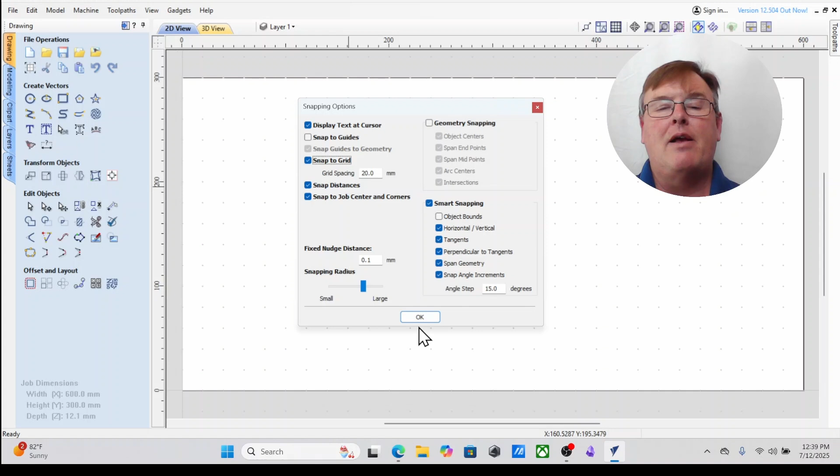Then we're going to take advantage of the grid snapping. So go to the grid snapping tool, top of the Vcarve software, click on it. Some dots should appear. If they don't, go ahead and click F4 and click on snap to grid. I like them every 20 millimeters and click OK. That allows me an easy spot to reference off of.

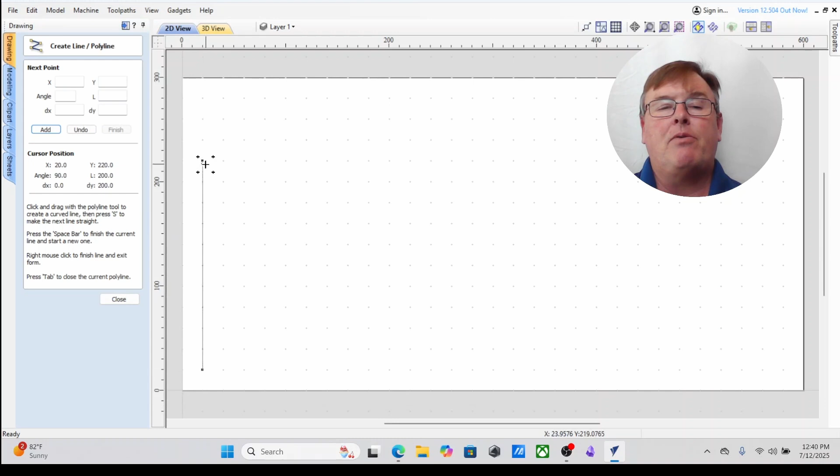Then I'm going to create an L bracket and a couple horizontal brackets on here that we could do profile toolpaths on to create our braces. Let's go ahead and do the corner brace using the polyline tool. Click on it. I'm going to start one dot to the right and up, and I'm going to trace an L pattern going 40 across and creating a structure something like this. You can make it however big you want it. I'm going to click close.

There's our L bracket. This would be a problem if we came with a CNC bit, because it's a round bit. It's not going to be able to get this corner perfectly, and we want this edge and this edge to stay perfectly straight. So we need to cut a little pocket so that we can push a board this way and down and not have it run into the corner that is not correct.

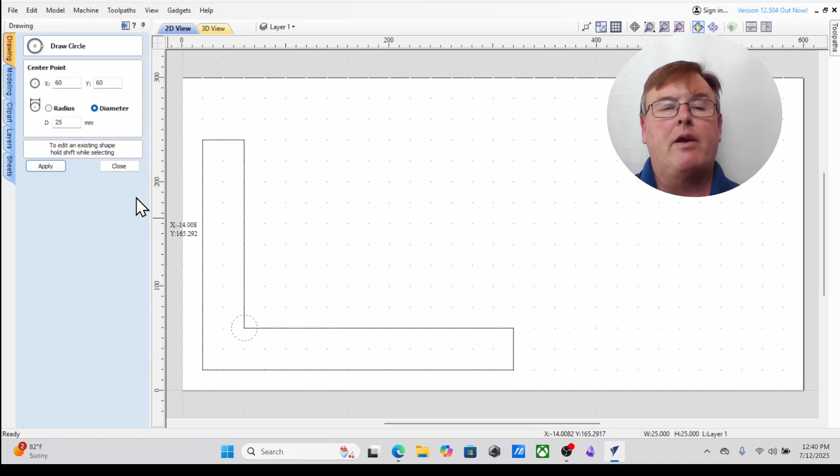To do that, we're going to go ahead and click on a circle, and we're going to put in a diameter of 25 millimeters. Click on that corner. Then we're going to go down to Edit Objects. We're going to find the little scissors, which is an interactive trim tool. Click on it, and we're going to cut out some of these lines. Now we have a nice corner spot to put a board against.

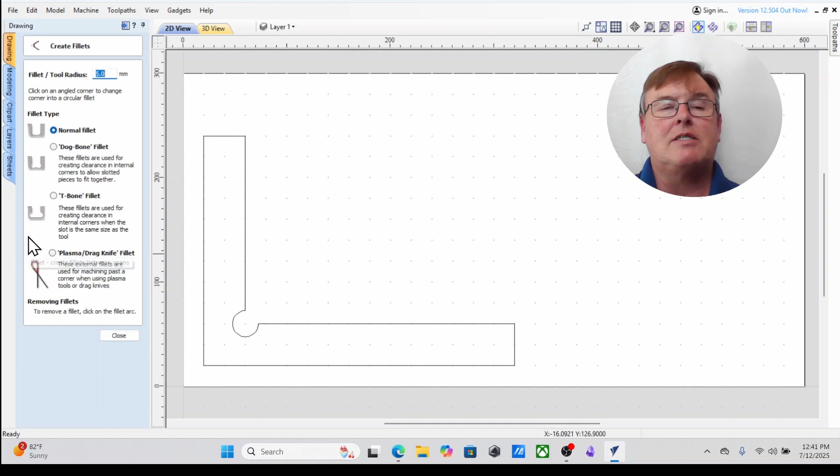We can make this even nicer. Let's go ahead and utilize another feature that's inside Vcarve. Under Edit, you should have something that says Fillets. Change the tool radius to 6 millimeters. That's a nice corner. And everywhere there's a corner, we're just going to click on it, and that will smooth everything off nicely. So we get good, clean lines when this machines, and we're not going to run our hand into it and scrape ourselves up in the future.

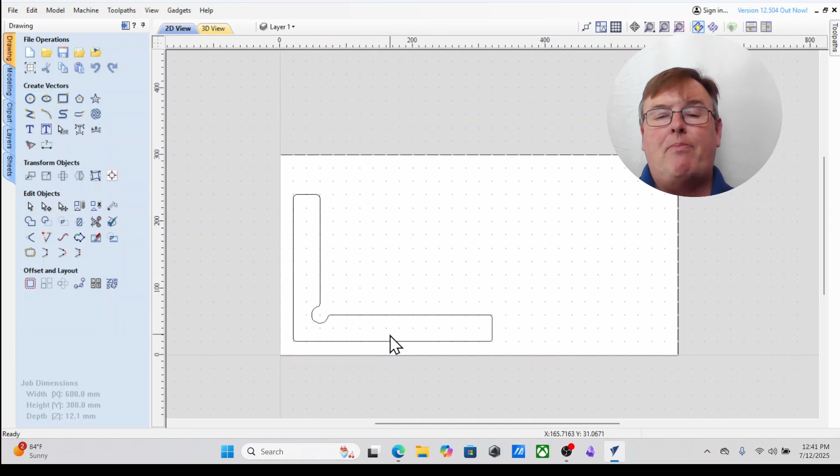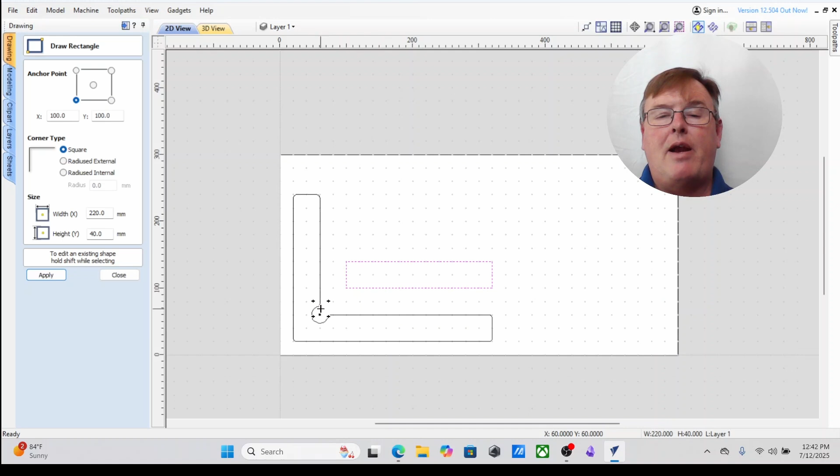At this point, we could go create a profile toolpath, but I'm going to stop there for the moment, and let's go make a couple other ones. I'm going to use a different method now. I'm going to just use a rectangle tool, and I want a nice horizontal rectangle that I can use to mount, and I want it 40 high and 220 wide, and I'm just going to click on here. The starting point will be on the bottom left-hand side, so I'm going to click it maybe down here, and there we go. Let's go ahead and fillet off those corners. So I'm going to come in here and I'm going to put some fillets.

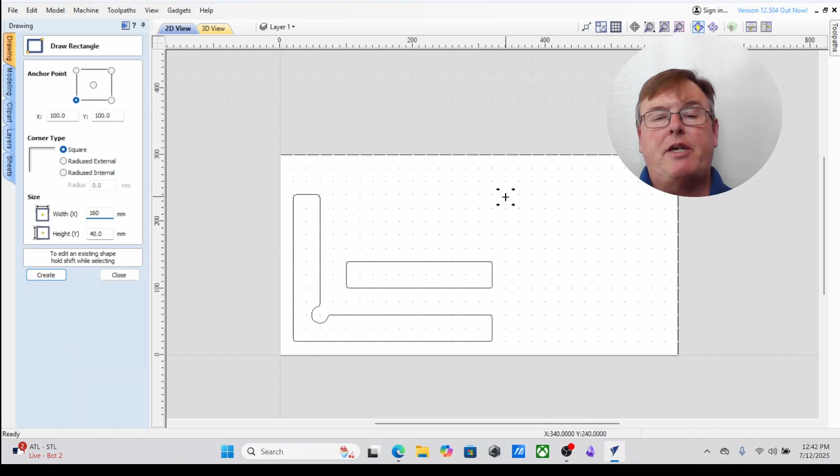And let's make another smaller brace. Let's go and click on the draw rectangle tool. And let's say this is 160. Let's make a little pieces that we can mount on our CNC machine. You can make these whatever size you want. And I want to just go ahead and put it up here and click on it. Let's go ahead and fillet off those corners. We're still using a 6mm fillet. Like so.

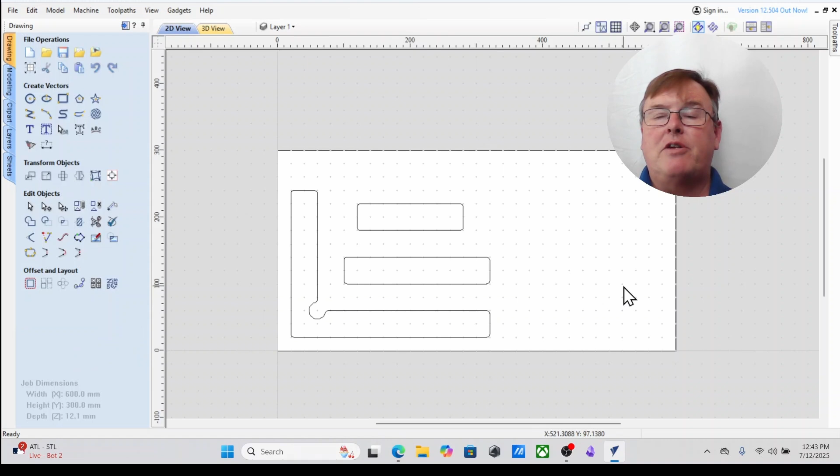If this is your first CNC, we could just profile toolpath this off, hold down my left mouse button, keeping it pressed, and dragging a box across to encapsulate all those vectors. Now they're all selected, they've lit up in red. Go over to my toolpath tab, click on the thumbtack so that it holds it in place. Under toolpath, go click Profile Toolpath. For the start depth 0, for the cut depth, whatever your board thickness is that you're cutting your pieces out of. In my case, my plywood was 12.1 millimeters thick.

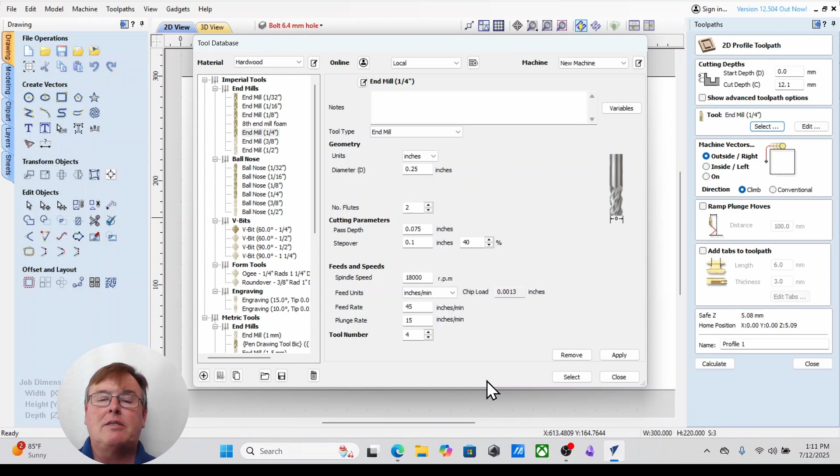I'm going to select my tool. I want a downcut bit so that it makes the top edge of my plywood as nice as possible. So this is a 1/4 inch downcut end mill. I want to cut outside the lines. So by doing that, my bit will come around and the far edge will be on the outside. That means this distance here will stay the full 40 millimeters, which is ideal since my grid lines were that way. When I screw this down into my main spoil board, I can just line it perfectly over those grid lines and I know that I'm perfectly parallel.

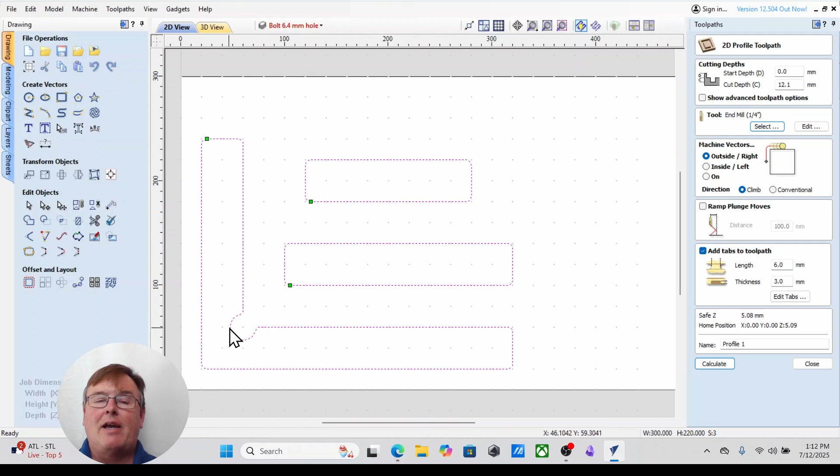Then I need to add in tabs. If I were to cut this as is, when I do my final pass, one of these pieces comes rattling loose and potentially flies back at me or, more likely, damages the surface. With that being said, I'm going to put in enough tabs that I think is going to hold it secure. Put as many as you think are necessary. And here's what I'm using for my tabs. I don't really want to put tabs here, here, here, and here because I want this edge to maintain as pristine a condition as possible. Same thing here, I'm going to call this my good edge that I'm going to be mounting boards against.

So I'm going to put my tabs on the other side of here, and to put a tab in, you just need to hit the edit tab button and just click wherever you want the tabs. I'm going to put about 3 on each side around each of these structures like so. And I want 1 on each end. And when I get all done, I'm going to cut these tabs and sand them off anyway. But I still don't really want to have anything marring up my good edge. Something like that's great.

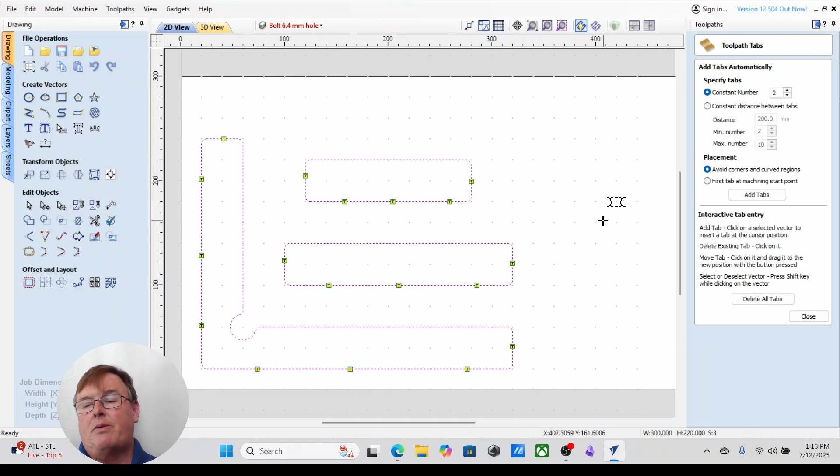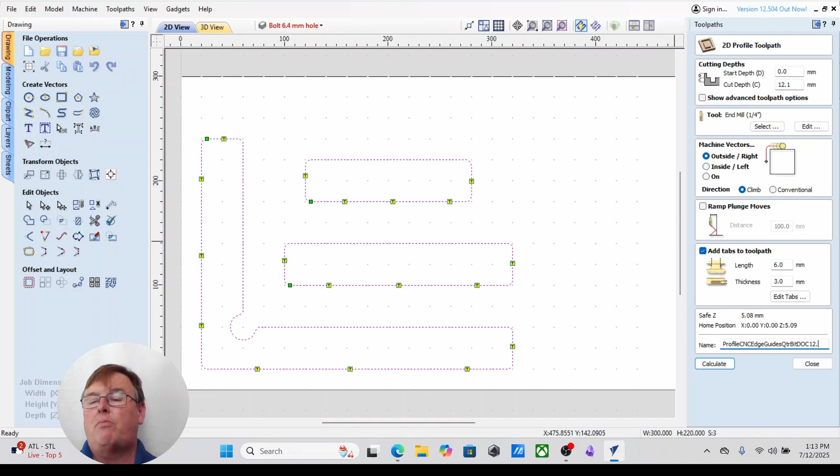And let's change the name of this. We can just call this Profile CNC Edge Guides, 1/4 bit, depth of cut 12.1. Calculate. Let's see what this is going to look like. So I'm going to reset my preview and preview visible toolpaths. And there we go. And you can see those tabs would hold it in place.

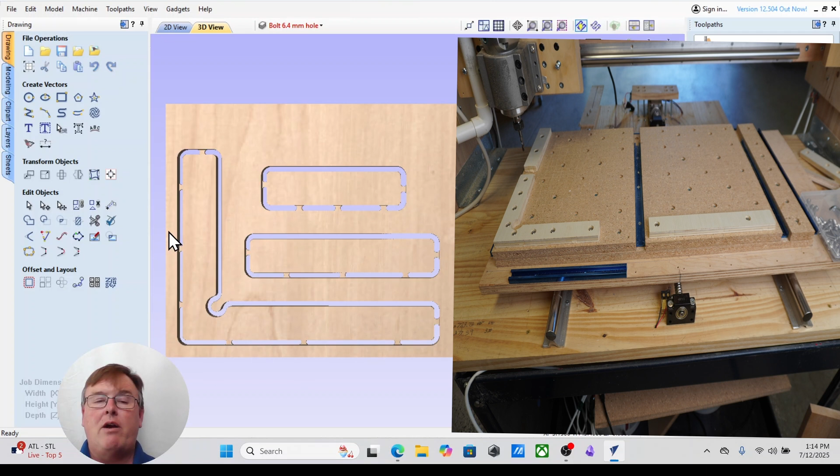And then we could go cut them out. Place this over the grid lines that we already have cut into our spoil board. Screw it down. This would be in the corner. These would be, you know, 1 out here and maybe 1 up here, rotated. And you could make that work.

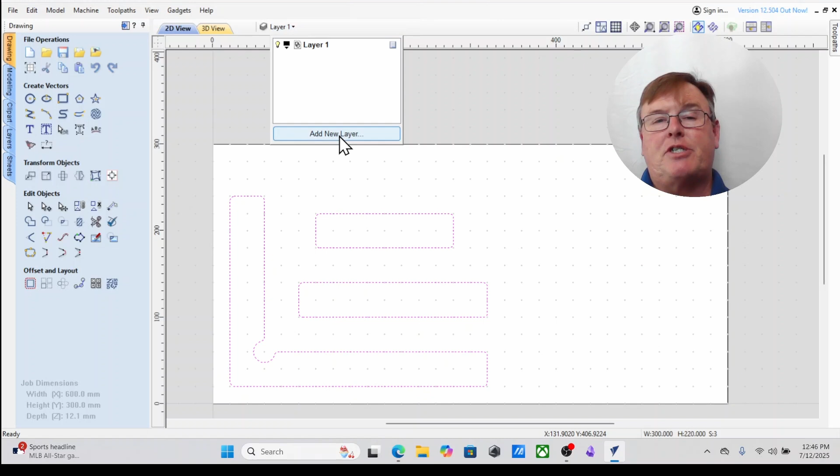I'm going to go into my 2D view over here, and I'm going to put in some insets for some bolt heads, and I'm also going to put in some 1/4 inch bolt holes for different positions that are evenly spaced across each of these. So let's do that, and it's handy for selection purposes to add a new layer. So I'm adding a new layer, and I'm going to say this is bolt head insets, and I'm going to go 12.5 millimeters diameter. So let's do that, and then you can decide where you want to put the bolt heads. Those bolt heads are going to have threaded inserts underneath that we can go into.

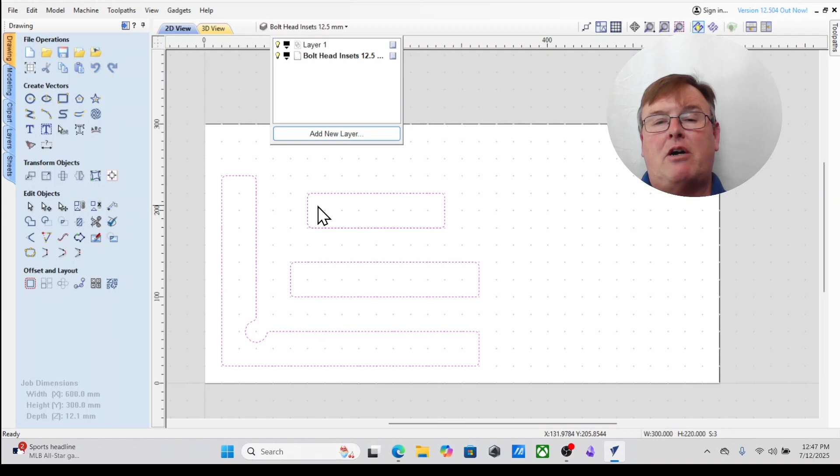So you want to be thinking about where a position is on the board below your spoil board that you can actually have spots for threaded inserts. You don't need them in all these spots, but it's better to actually cut the positions here, even if you don't end up putting threaded inserts into all the positions on your actual spoil board. I think it'll make more sense when you actually see it done. So let's go ahead and do this now.

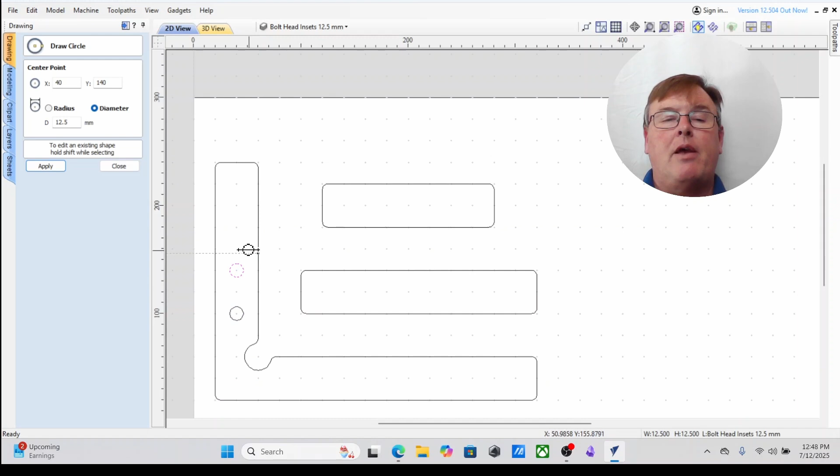And I'm going to click on the circle. I want the diameter of this to be just slightly bigger than my bolt head. I'm going to use 12.5 millimeters, and I'm going to click it in positions that I think would be a good spot. I'm going to start the first one at 80, and then, excuse me, this one was 100. I'm going to do at 140, at 180, and at 220.

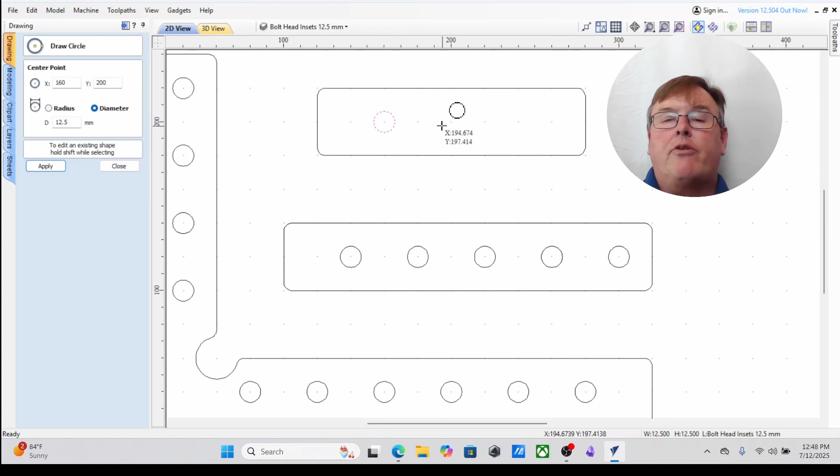Then I'm going to come across here, and I'm going to do one at 80, and I'm going to do it every 40 beyond that, all the way out for everything that'll fit. I'm going to do a similar strategy for these other pieces. So I'm going to just go fill in along the way, and you can decide where you want to put your bolt holes. Oops, I don't like the middle one there. I would like it like that, so it's nice and evenly spaced. That makes it easier to put your threaded inserts below. That looks great.

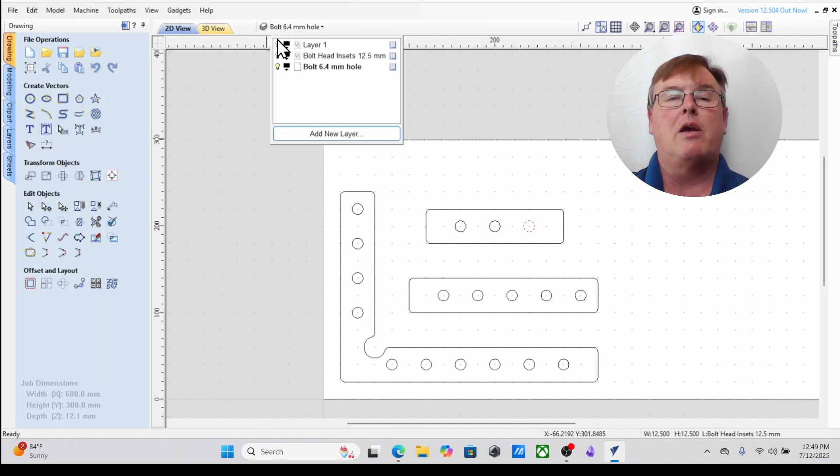And let's go ahead and do another layer. Add a new layer, and this will be bolt 6.4 millimeter hole. With that being selected, I'm going to turn off this other layer and make sure this one is the active one. I'm going to just go ahead and click on a circle. Make sure you change the diameter to 6.4 millimeters. And everywhere one of these was, I'm going to just click inside of it and put my inner bolt hole.

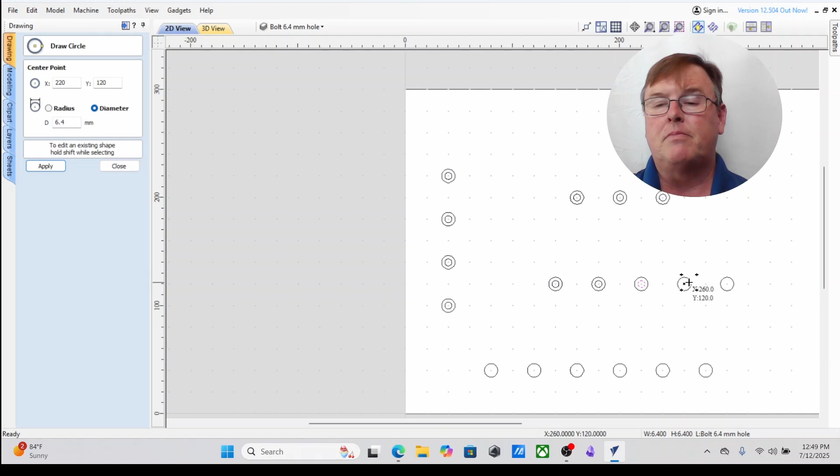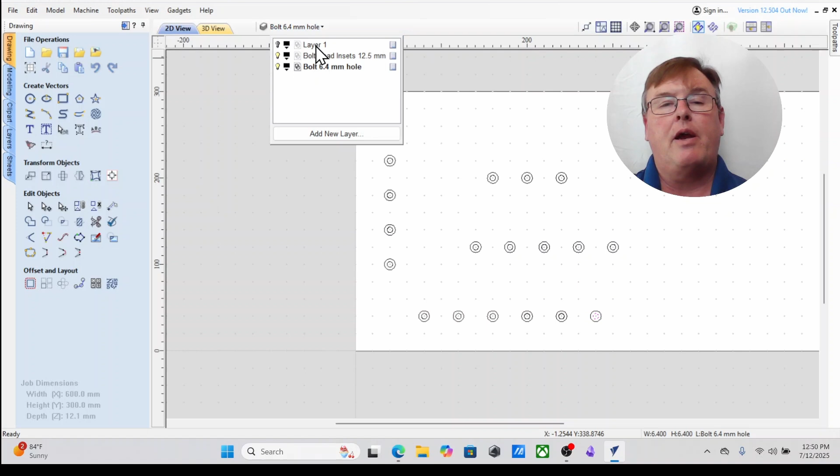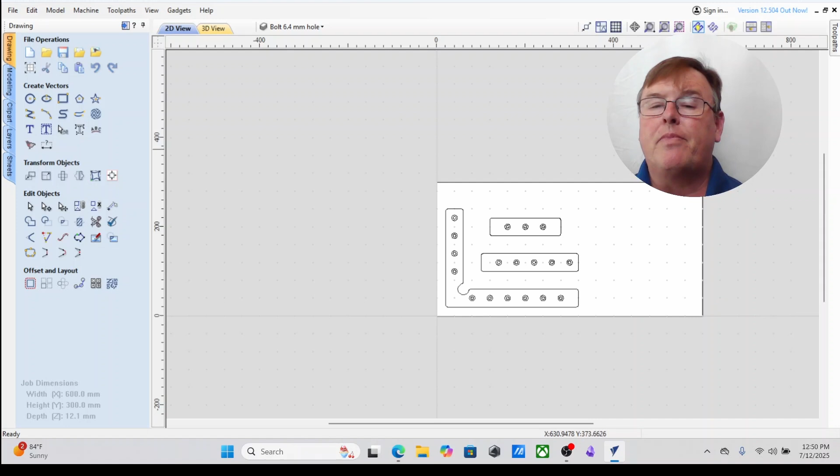It's pretty fast. Close. We go back to my 2D view and let's make all these active. So there's all our pieces. Before I do anything else, let's go ahead and save this file. So let's save it. And CNC, I'll just call it braces. Something like that. Now let's go make some more tool paths.

I'm going to unselect that by clicking off, and I'm going to go ahead and turn on my bolt heads, turn off that first layer. I'm going to go select all these in one swoop. Then I'm going to go do what we call a pocket tool path, and I'm going to do a start depth of 0, and I want it to be the depth of the head of my bolt, which I'm going to do 3.5 millimeters. I don't want a 1/4 inch or an 1/8 inch bit. I'm going to remove this. I'm going to select, and I want that 1/4 inch down cut again.

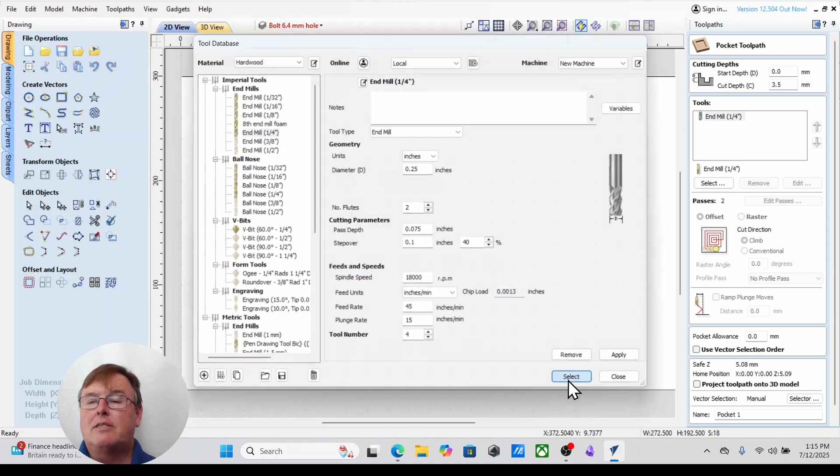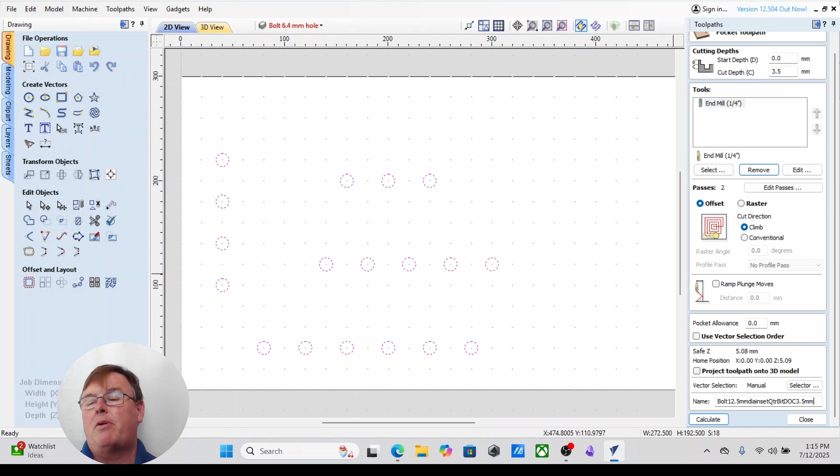Select it, and everything looks good here. We're going to call this bolt, 12.5 millimeter diameter, inset, 1/4 bit, depth of cut 3.5 millimeters. Calculate. Now, I really would like those to be cut before this other profile toolpath. That'll minimize the chance of it putting stress on those tabs.

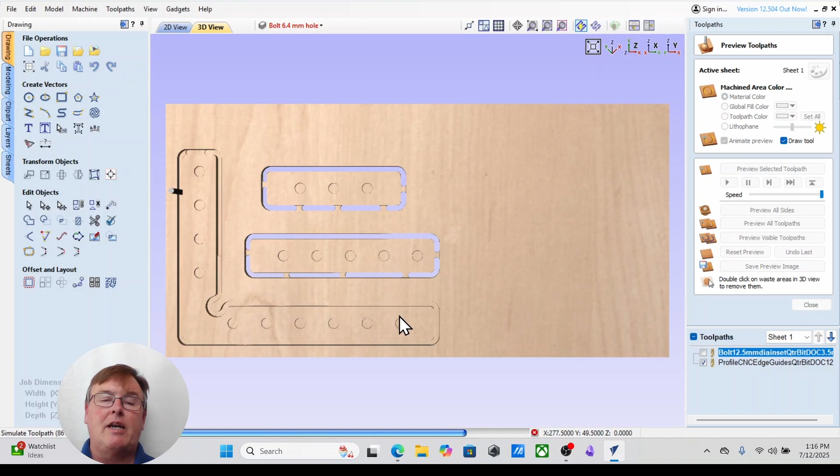So what we can do is, with that selected, go ahead and click this up arrow and we'll move it above. I'm going to now select both of these. I'm going to reset my preview, and then I'm going to preview visible toolpaths, and you can see that it cuts the insets first and then it does a profile. That looks great. And now finally we need to go get the last one.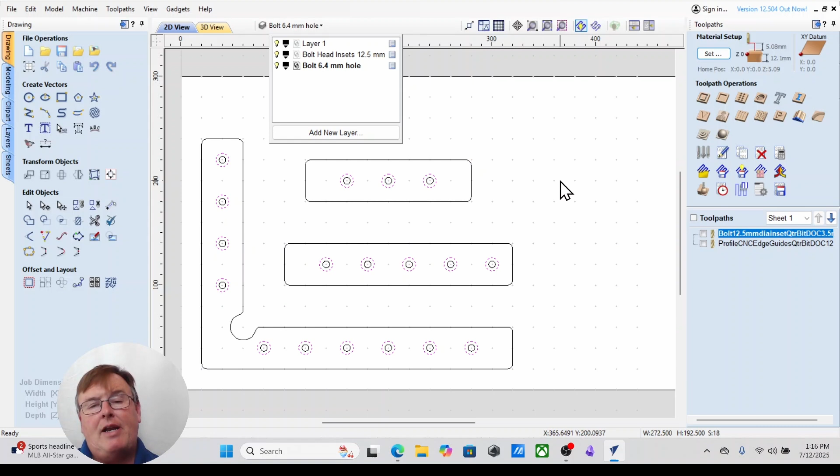And the last one, going back to my 2D, I'll turn on all the layers, is of course the small bolt holes. Really tempting to use a 1/4 inch bit here and do it, but if you do a downcut bit, chances are it's going to overheat and it potentially could cause a fire. So I'm going to go extremely conservative. You could do a 1/4 inch upcut bit and it will probably be fine, but I'm going to go the most conservative route possible. And I'm going to go ahead and turn on just that layer.

I'm going to select all of these, and I'm going to do it with an 1/8 inch bit as a pocket. And that gives me plenty of room for everything. So I'm going to do this, and I already have the inset cut. So I'm going to do a start depth of 3.5, and then I'm going to finish out the depth of my board, which is 12.1. But rather than putting a cut depth of 12.1, we've already done 3.5. I need the difference. So 12.1 minus 3.5, that means I only want to cut 8.6 down.

If I put 12.1 down, it's going to be like 15 millimeters. It's going to cut into my main spoil board below, which we don't want to happen. So make sure you don't make the mistake of doing this. You could start at 0 and do 12.1 if you wanted to do it that way. It'll just take a little longer, and it'll be cutting air if you cut the other pocket first.

I need to change out this bit, so I'm going to remove the 1/4. I'm going to select the 1/8 inch, and this will be a downcut bit as well. You could do an upcut bit, that would be fine. And it's going to do quite a few passes. We could probably increase the depth that it's cutting, but I'm going to leave it as is.

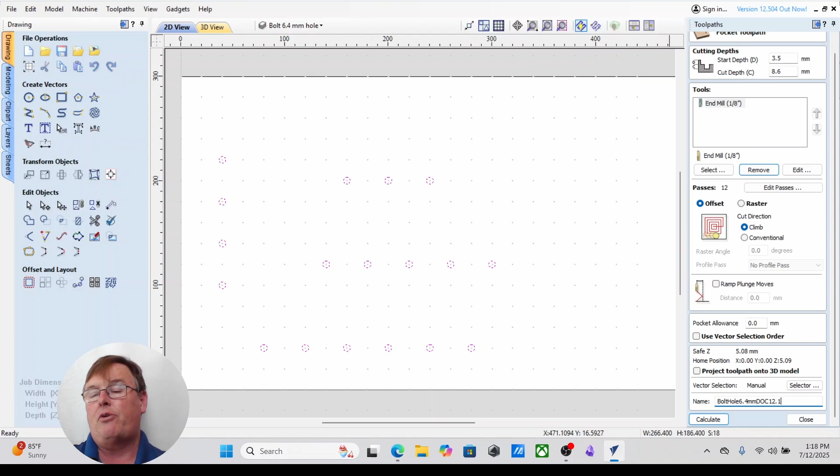And I'm going to do bolt hole, 6.4 millimeters. Depth of cut, I'm going to do 3.5 plus 8.6, 12.1. And then I'm going to do bit 1/8. Calculate. Let's go ahead and see these all machined out.

This will start with the insets, and then it will do the profile tool path, and then it will do the 1/8 inch. The 1/8 inch is cutting such a small hole, I feel confident with as many tabs that that is not going to be a problem. But if you're worried about it, you could always cut this inset first and then do the 1/8, and then you'd have to remount the 1/4 inch bit and start over.

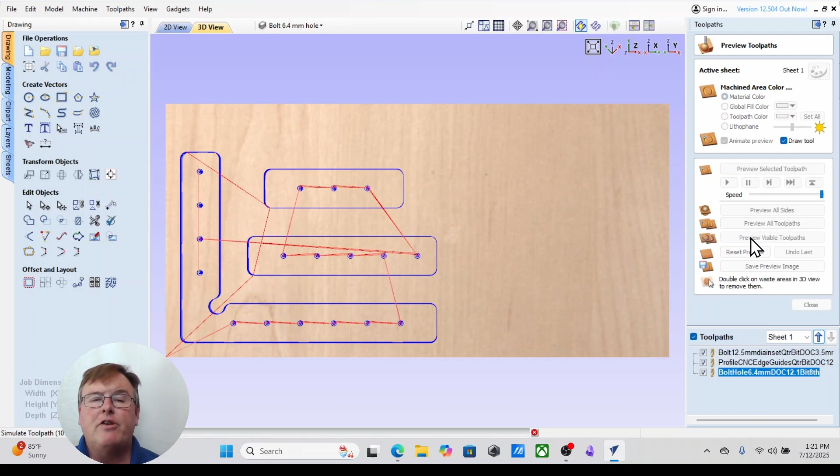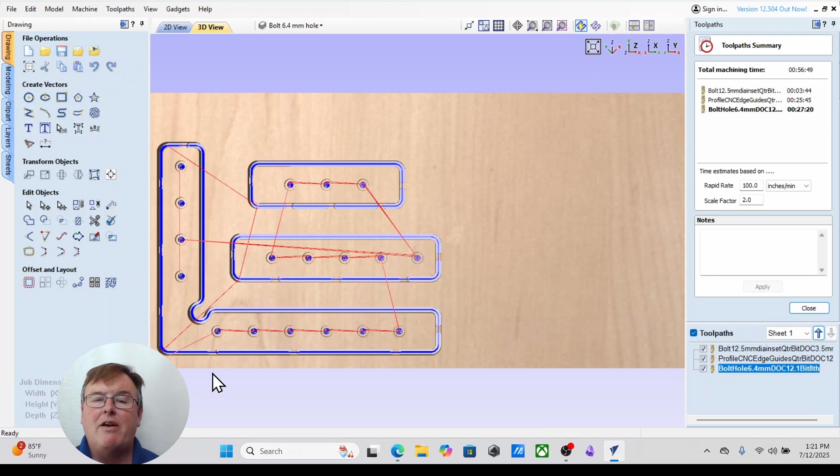So let's preview the visible tool paths. And there we go, you have everything machined out. Let's see how long this would take, putting these all together. It looks like to cut all that out, it'd take about an hour with your CNC. You could definitely speed this up considerably. These tool paths are much smaller, and the scale factor here is 2. It's going to machine out faster than this, probably by at least 20–30%.

I've got my square clamp on the corner, a side support. I made a few less through holes in mine that I mounted on my CNC than I modeled in the CNC software. Yours actually has more versatility because it gives you more possibilities of shifting forward and backward as far as squaring things off. And underneath each of these bolts, obviously there's a threaded insert that I put into the particle board. I put it dead center at the crosshairs of my grid lines so that I know it's perfectly aligned.

So I had my CNC actually mill those threaded insert holes. When I milled them, I did a 12.5 millimeter hole in width, milled down 4 millimeters for the top of my threaded insert, and then I went an additional 10 millimeters. That gives me a little extra room for the threaded insert at a hole diameter of 9.1 millimeters.

Let me show you the beauty of what we've done. I have my square corner bracket. I have a couple side supports here, and I'm going to go ahead and just slip a board like I was going to CNC it. I'm going to press it forward, and then I know that this edge is flush, so it's parallel to my router, and then I push this way and I know it's aligned that way. And then to hold it in place, I could use the T-tracks, but I'm going to use something else.

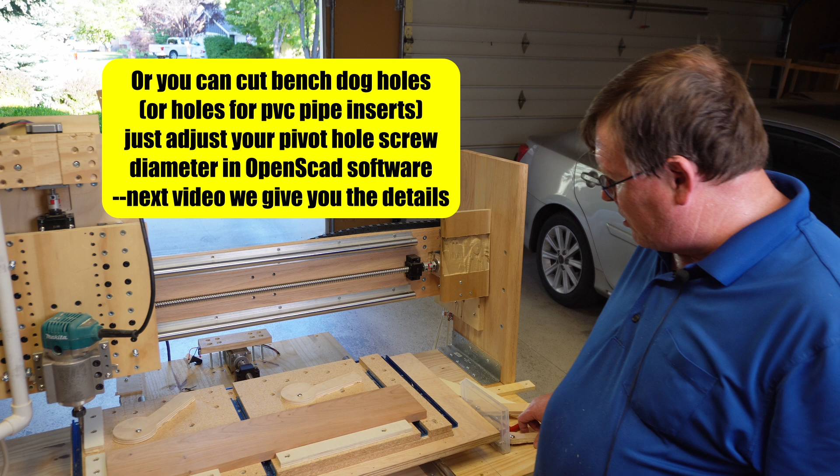When you get all done, you're going to put threaded inserts into your table, and then once you have those threaded inserts in, you can pivot this. If your threaded insert is too far away, so it's not actually hitting the board, you just put a shim board in and press, and it will push pressure. And here's another cam I've got on this other side, and I'm just going to put a little shim in, and I'm going to press, and when I'm done, you can see it's got a nice hold. I could put another hold down over here if I wanted to, but that does a really nice job.

The beauty is when you get all done, you just release the cam, you pull out this, and you're ready for your next board to go on. You didn't drill any holes, you didn't waste anything on your CNC.